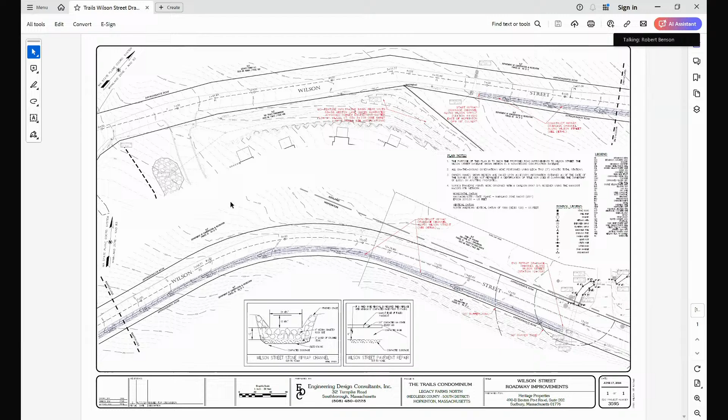I don't think that's a bad idea. Mr. Bemis or Mr. Gately, would you be willing to meet us out there to give us the lay of the land? I think it would be helpful. Probably, in '23 when we did those design changes, that's how we did it. We had a joint meeting with conservation and planning. I thought it was very effective—you got to see firsthand what we were describing and discussing. So I'd be glad to meet you anytime.

Could I propose not this weekend, since it's a long holiday weekend for a lot of people, but what about availability for people on the planning board and yourself for July 13th? I can be there. I can do the 13th.

Through the chair, I can be there also. Could I ask Peter to put a compass on the map, because he's referring to east side, west side, and it's hard to visualize on the map? There's a north arrow on the plan, on the left-hand side of the sheet. It's so small I couldn't see it. Sorry, but you need to know orientation for this to be understood. No question, thank you.

How does 9 a.m. on the 13th sound for people on the board and Peter, yourself? I'll make it work for you. That's perfect, thank you. I wouldn't be able to make that, but I could just try going on my own time to take a look. Same here, Rob—I won't be able to make it, but I'll try to catch up on my own time.

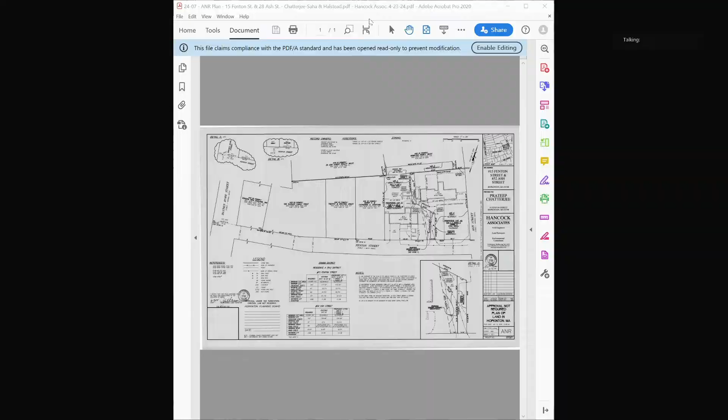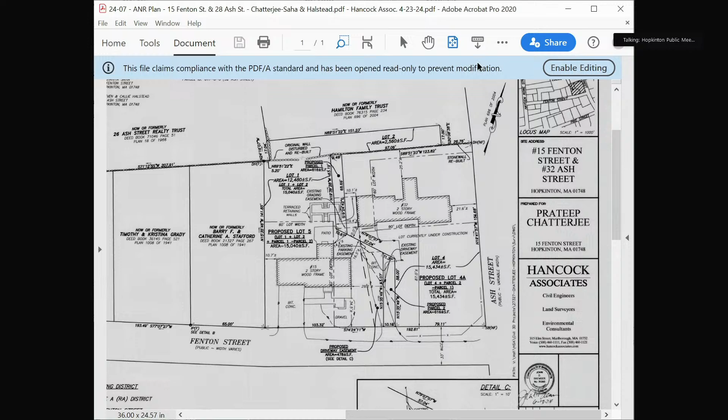All right, is that clear for everybody? Yes, yes. I'll zoom in. So when you look at it, if you want to just look over here at this locus map, you can see what currently is.

It's a little wonky, right? So here's one property, and here's another one. What this plan is proposing to do is just change the lot lines a little bit. So lot 2 is going to go with lot 1, and that's going to be part of lot 5. And parcel 2 and lot 4 are going to be lot 4A. So it's kind of tough to see the boundaries, but they're basically just swapping land.

So the original boundaries are, if I can follow it correctly, here, down to here, and back up to the beginning. So this parcel is outside of the original, over here. So they're taking this and moving it over here. And they're taking this, which was still part of this, and moving it over there. And then taking parcel 1 and moving it over to here.

So they're just kind of doing a land swap. They're not creating any real new lots. They're keeping two of the same lots, just changing the property lines. It's effectively really swapping this piece with this piece. That's the proposal. Got it.

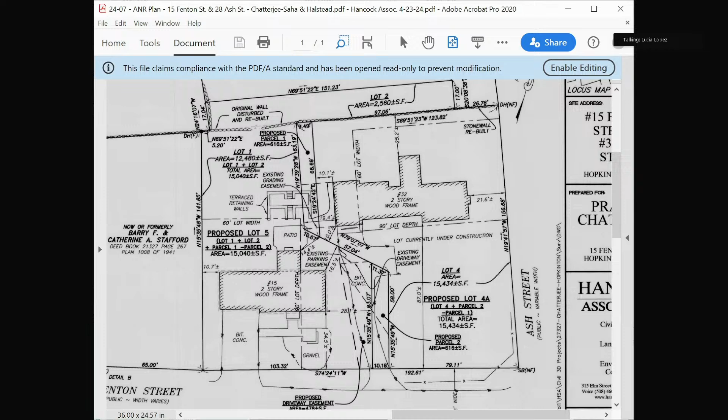Through the chair, I did send John an addition, I can try to pull it up for a second. So it's on the discussion regarding affordable housing with the two properties that we talked about. I can read what I sent, it's two sentences, a little long. So I'm suggesting adding: Ms. Lopez mentioned the need to consider that those two properties are the bulk of the town's affordable housing numbers, and we need to ensure we remain above 10% affordable units to prevent potential 40B developments. Mr. Gelsich commented that those two properties were developed such that all units are included in the town's subsidized housing inventory, and redeveloping them under the new requirements would result in a large reduction to those numbers.

Yeah, so I remember that conversation, and we all agreed we didn't want to lose affordable housing units as part of creating a zoning overlay district. So does that, I agree with it. I don't know about anyone else's opinion on the board. I am glad that Lucia added those, made that amendment. I noticed that was missing as well, but didn't do as good a job capturing it.

Lori, do you have the comments that Lucia provided? Yeah, she sent it to me by email, so I'm going to add that in the affordable housing part. Okay, so if there's no other comment, is there any other comments before we move on?

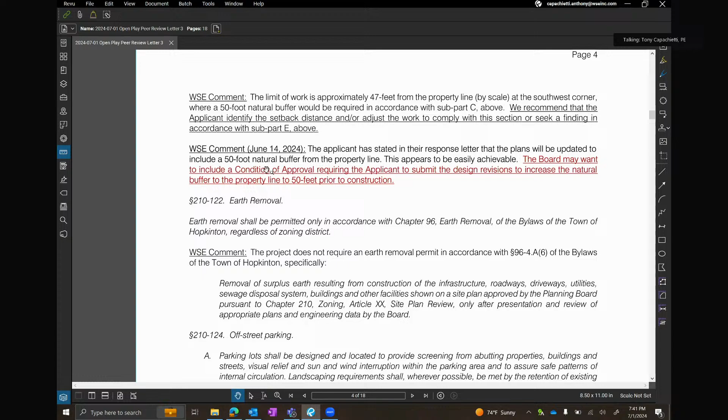A few pages before we get to one. So if you recall, the limit of erosion control was 47 feet away from the property line, and the zoning requires a 50-foot natural buffer, but the limit of the actual work was 50 feet away. But just to limit the possibility of a contractor going out into that 50 foot, they're going to tighten up the erosion control on the final plan, conditioning that as part of the approval that they get revised plans showing there's 50 feet, which is not really a big issue for them to do.

Next one was they were going to make one of the ADA spaces, one of the electric vehicle spaces, ADA compliant. Evgeny actually sent a sketch over. They're going to move the EV spaces right up against the building, so all those spaces are handicap accessible. So that will work.

Just showing the existing tree line to remain on the grading and drainage plan, again just so they don't clear cut. It's on the landscape plan, it's labeled there, but the landscape plan is kind of the last thing a contractor would look at. They're going to have the grading and drainage plan out early on as they're doing tree clearing.

There's some easements that they require to tie into the utilities. Again, before they start construction, they should submit a copy of that to the planning office just so you have it.

The sightline discussion, for just showing that the sign is outside of the sightline, adding that to the plan as a condition, or moving the sign if the sightline does interfere with it.

Light fixture height, they did go to 12 feet, but just adding that to the final plan set. They stated they are using lighting controls, adding a note or adding a condition that the lighting controls be used.

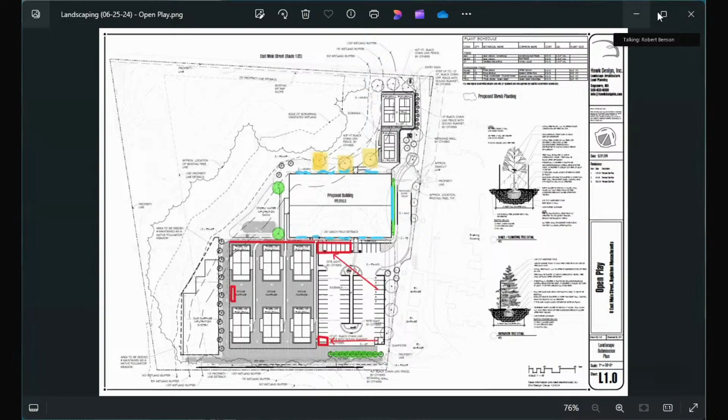Okay, so here is this, do you see my pointer? Yes. Okay, so this is the row of those evergreens. They will screen from headlights going this way, and also from this arm of the parking lot as they are turning here. Okay, so this should address the other comment. Any questions about this one?

No, nope. Okay. Another comment I remember was about the trash, the garbage bin, the dumpster, that it was in proximity to a neighbor. So I talked to my site engineer, and we've decided the best place for it is on the opposite side, further away, where there's no abutting neighbor, like they're somewhere here. So it's further away from the retirement community, further from that neighbor. That's something I wanted to show, that we noted the comment and made the appropriate change.

Any questions about this one? Okay, anyone on the board have any questions?

Okay, so go ahead. Over here, there was a row of 6 EV spots, and we've relocated them right here. One of these spots was already an ADA spot, and 5 were regular spots, and that's how it's going to stay, but all of them are going to be EV spots. So there's no real change in the design of the parking lot for those EV spots, it's just a relocation of them here. Any questions about this one?

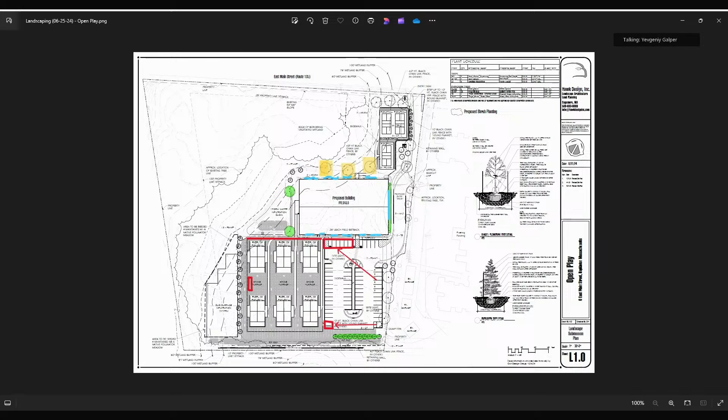Okay. There was an interesting conversation with the Design Review Board about murals on the building. We presented a mural right here, and I can show maybe what it's going to look like. Let me stop sharing this and share a different view.

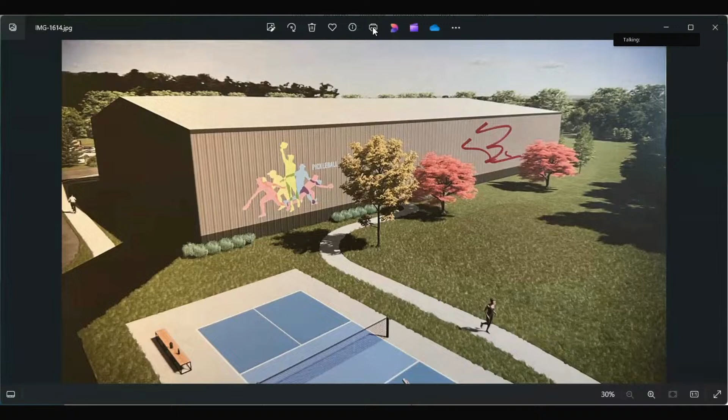Let me know when you see it. We can see it. Okay.

So you see the mural on the left-hand side? They suggested having a mural on this side and on the opposite side of the building, on the east side facing the retirement community. I think it's a great idea. I love the idea of turning this quite plain building into an art piece. It's quite appealing to me.

But what I also noticed is that I have three large trees here that were planted conceptually to screen that building. So right now I'm trying to figure out which way to go: plant trees to screen the building, or open it up and make those beautiful murals visible. Ideally I would like to do both, but with the trees, the murals are not going to be visible. I wanted to ask the board's opinion on which way they prefer, or whether it's my choice. So this is where I would like your feedback.

Through the chair, go ahead Jane. I personally like what you have here, a combination of both, maybe offsetting one with the other. Just a thought. Thank you, Jane.